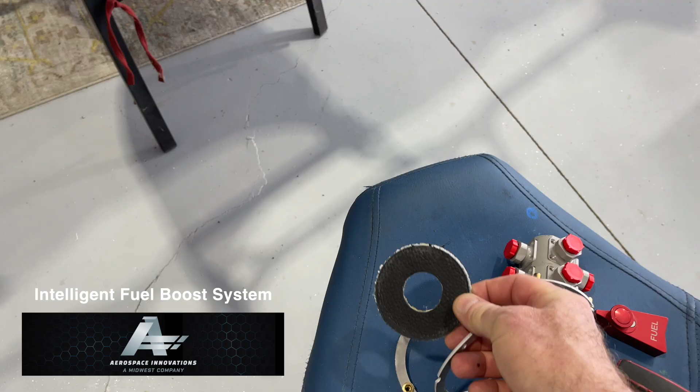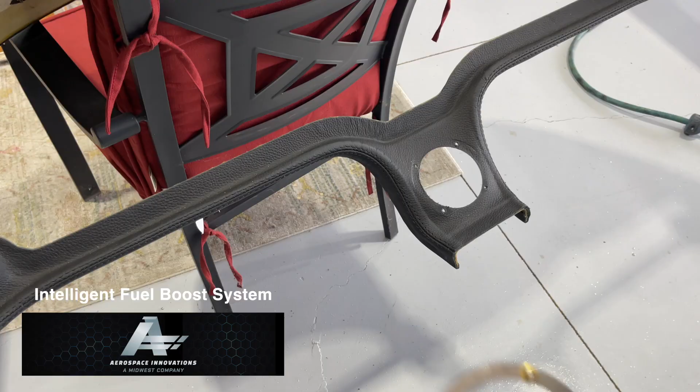This hole needs to be enlarged. So the hole looks like this initially. The kit provides this little template or ring that holds the piece while you drill the holes using this template ring, and then you keep those in there with Clecos. I used a hole saw to cut this piece out. Next, what goes in is this backer plate on the back here, and then we've got this detection board or sensor board that gets installed on top.

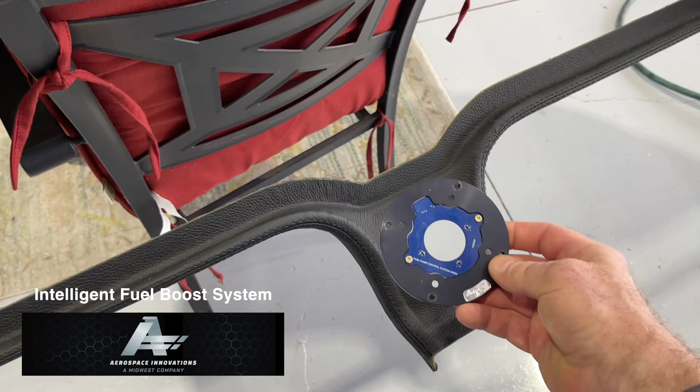So I'll do that next. This is the fuel selector as it will look when it's finished. Just mocking it up here so that we can see what it looks like.

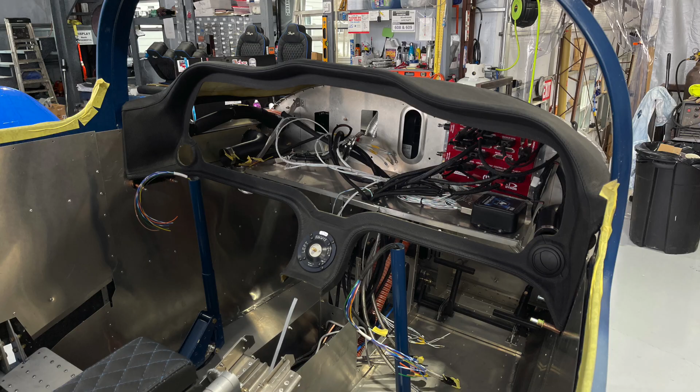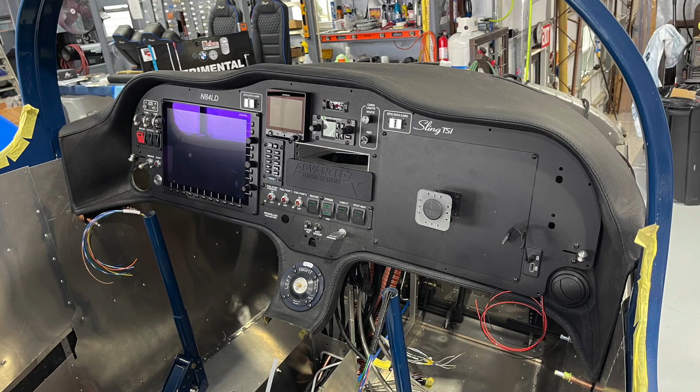And then, as you can see here, this is the leather dash panel inserted into place. The actual instrument panel on the top surface is not in place yet. You can see the fuel selector here, and now you can just see what it looks like. Again, just from many times of installing and uninstalling the panel, but I was anxious to see what it looked like in place. So that's just a temporary view of the instrument panel right there.

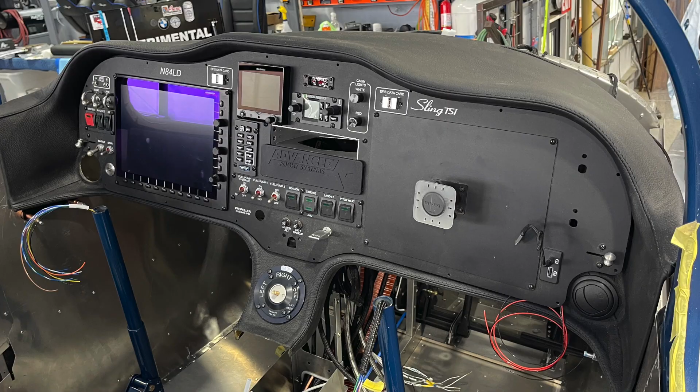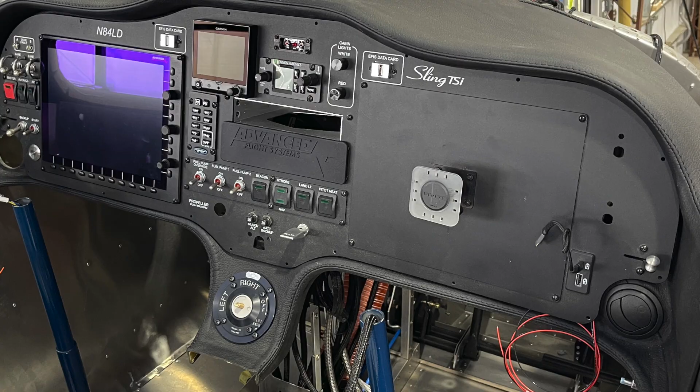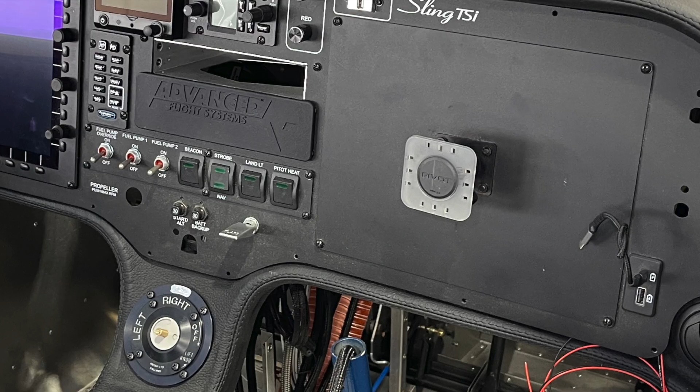On the right side there, you see that little bracket, the small square white bracket. That's where the iPad will go. Instead of going with two EFISes, I decided to go with just a single iPad in that location. I just like that, because otherwise you're just going to have an iPad somewhere anyway, so why have two EFISes and then an iPad too? I felt like one EFIS is fine, and then I can put my iPad on the right-hand side and use that for flight planning and so forth.

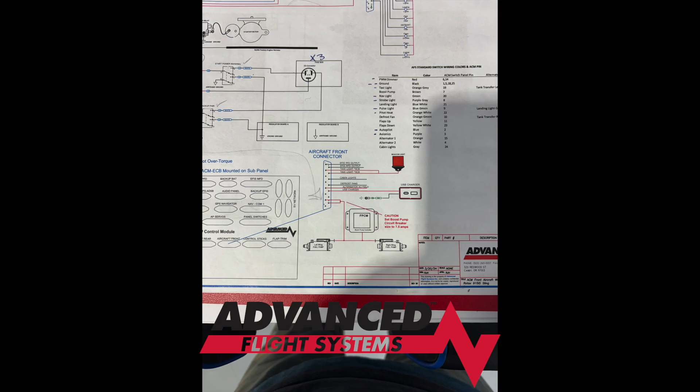So here we are, back into these wiring schematics and drawings that were provided by Advanced Flight Systems. They've done a great job detailing where everything goes. My communication with those guys has been fantastic. I work with Jonathan and Kyle both. I know Jonathan is probably totally wiped out from my emails and questions. I'll send him videos and questions I have on the wiring, and sometimes I'm overkill with it. I'm asking a lot of questions he's already answered, just reconfirming, so he probably gets a little frustrated that he's already answered the question.

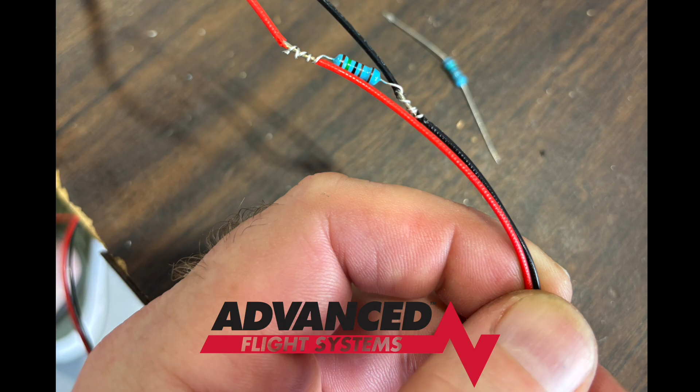Here is where the lane light indicators for the Rotax, lane A and lane B, go - you've got those lights above each of the lanes, and then there has to be a resistor installed. So I worked with Jonathan on how to do that, and those are in place now.

These are the fuel pump switches, from Aerospace Innovations, the guys up at Midwest. These fuel pump switches integrate with the existing Rotax fuel pump systems - not boost, just a pump system with Rotax. So we're combining these switches with the original system. Just showing you how the wires are laid out, and there's quite a bit of wires there. Here we go with the HIC A and HIC B.

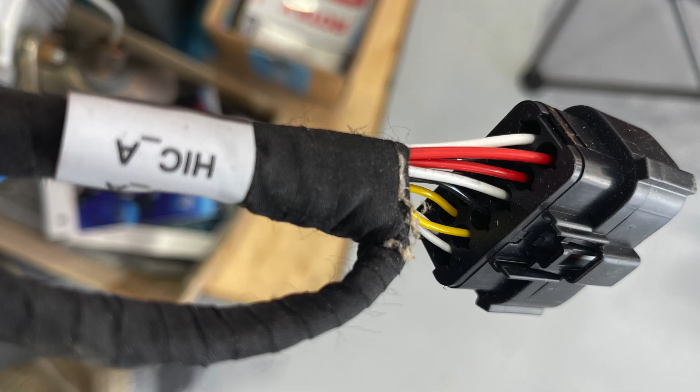So this was a new thing for me. When I built the Bearhawk, I was using a Lycoming IO-540, and the amount of electronics and technology on the Lycoming is not as significant as it is with the Rotax. So I've learned about what the HIC A and HIC B are, which was pretty much a new world for me. It took me a while to grasp this. I studied the Rotax manual, and I studied other builder videos.

And so these were things that I had to understand. This plug actually gets installed through the firewall, and here is an example up there at the top. That's the opening for where those plugs will go in, and then the HIC A and HIC B connectors go underneath the instrument panel, and then there are more wires that come in from the panel into the HIC A and HIC B. So again, it's just a completely different way of thinking about wiring compared to what I was used to in the past.

Here are the two inside, these two plugs you see, are round plugs, sometimes called cannon plugs. They did not come with the kit, although there are two holes in the firewall specifically for these. So I struggled with that, and finally found a builder who could get me the part numbers from Mouser Electronics, where I ordered these from, and I got those installed.

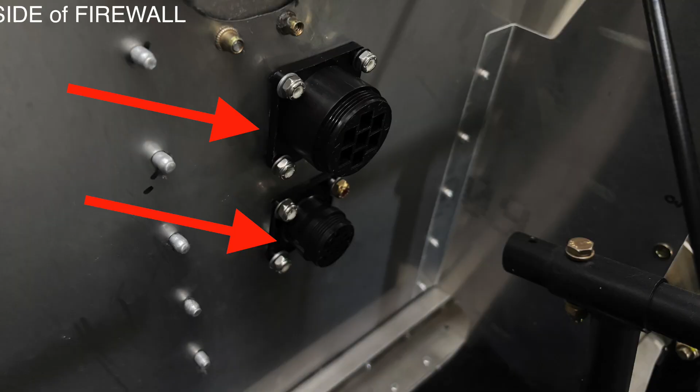So here we go. As I've been building my airplane, Rotax comes out with 3 service bulletins. One of them, the first one, was for the oil spray nozzle.

I was fortunate enough to connect with Sean Tucker in Rock Hill, who came up one day. He'd actually come up earlier in his airplane to visit his Sling TSi. I'm going to put a separate video out about the ride I took with him later on in Rock Hill, in his Sling TSi, which was actually my first ride. That was exciting, and it really confirmed that I'm building the right airplane.

But anyway, Sean Tucker's here with me. He went down to Lockwood in Florida, where there's a Rotax training center, and got his

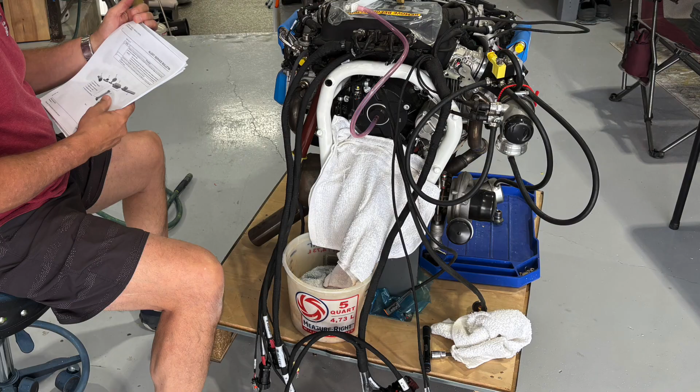I believe it's called IRMT, the Independent Rotax Maintenance Technician Certification. So with these service bulletins that came out, there's 3 of them. We'll talk about all 3 here, but like I said, the first one's the oil spray nozzle. We have to have an IRMT perform this inspection. It's just not something I can do myself and document in my logbook.

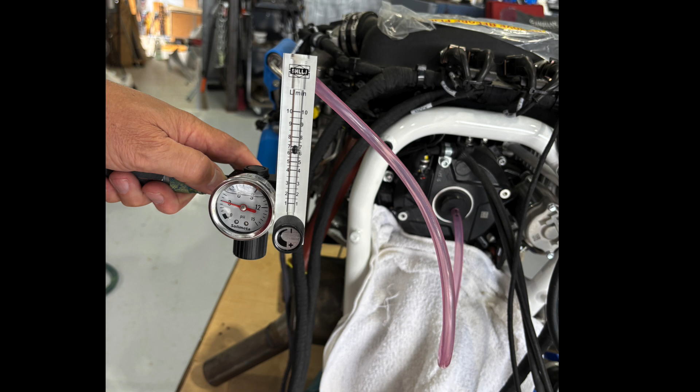So Sean is here with me. We're going through that, and he brought the tools to perform this inspection. We did it 3 times, I believe, and documented it here with this picture to verify that we are within the parameters on this oil spray nozzle.

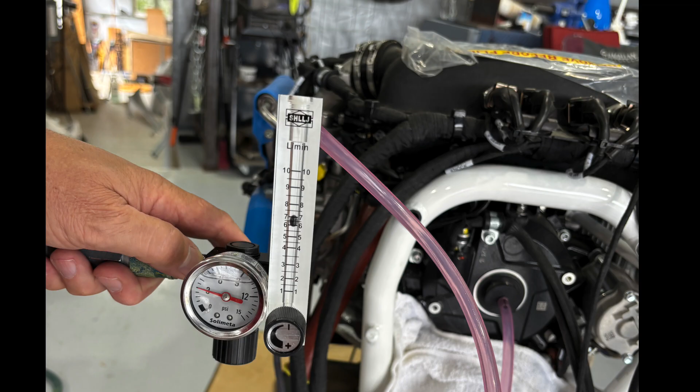So apparently what happened is at the factory, when these engines were built on the assembly line, too much thread lock was used on the oil spray nozzle. I don't know exactly the components inside, but there's an internal oil sprayer that, as I understand it, helps lubricate and cool the generator. If that orifice is blocked, that's not good, and the generator could fail.

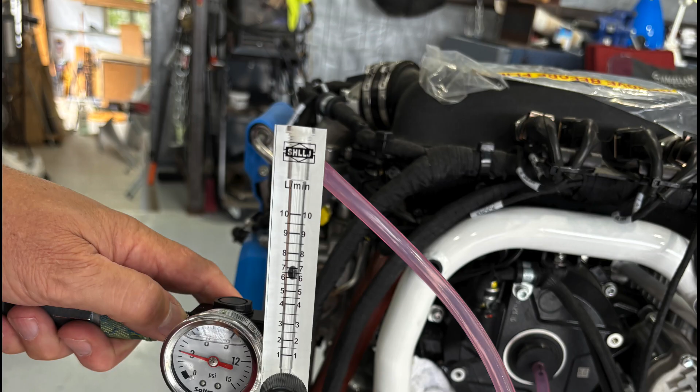Some people failed the inspection. Fortunately, in this case, we passed. That was a big sigh of relief when that was finalized.

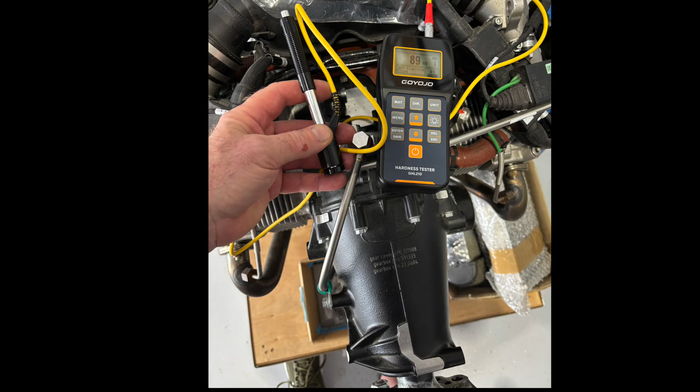The next one is the case hardness test, which is kind of surprising actually. You'd think that wouldn't be a concern, but apparently there's been some casting issues on these engines, so we have to test the case as well as the gearbox assembly. We test that with this tool you see in the picture, which determines the hardness of the material. I won't go into a big detailed explanation, but this test was also passed.

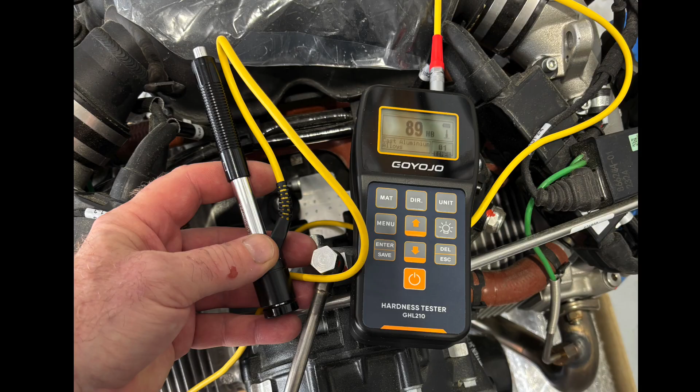So I don't have to send the engine off for any sort of repairs. That's good news.

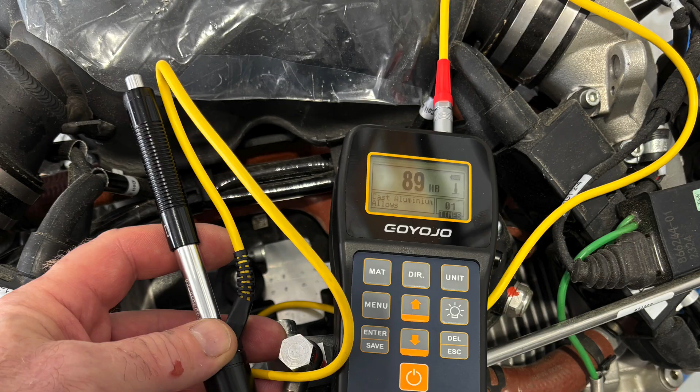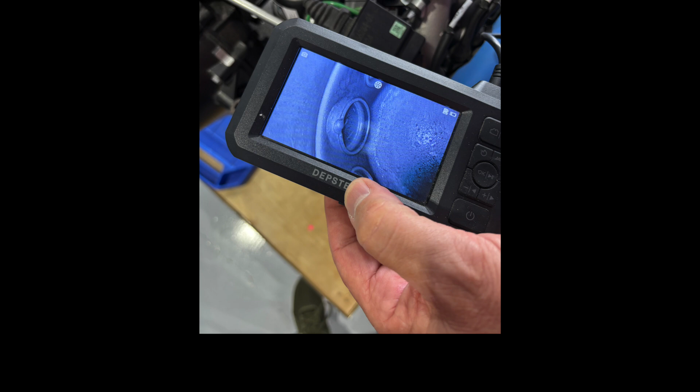Here we've got the expansion tank assembly inspection - again, another service bulletin. Fortunately, I've got this bore scope, and Sean again was with me. We use this to look inside. It's part of the coolant system.

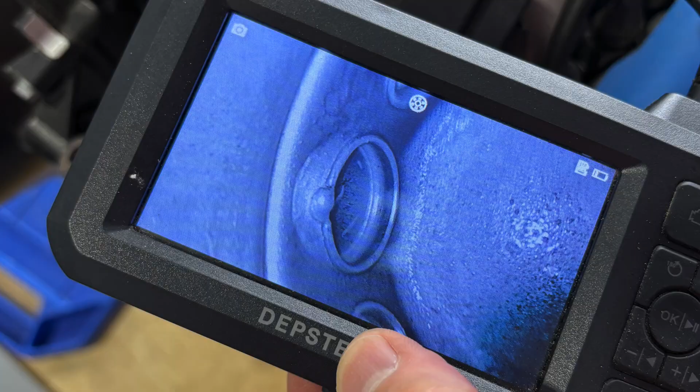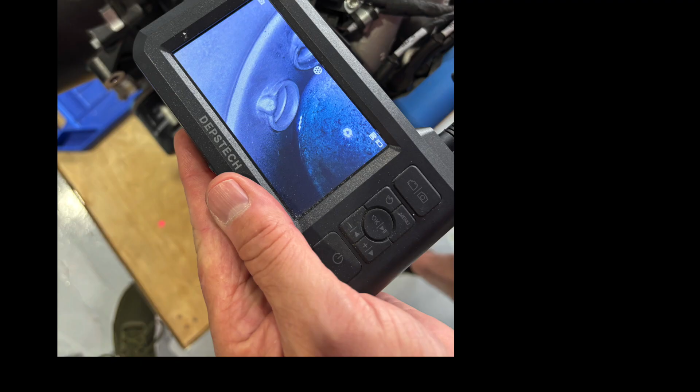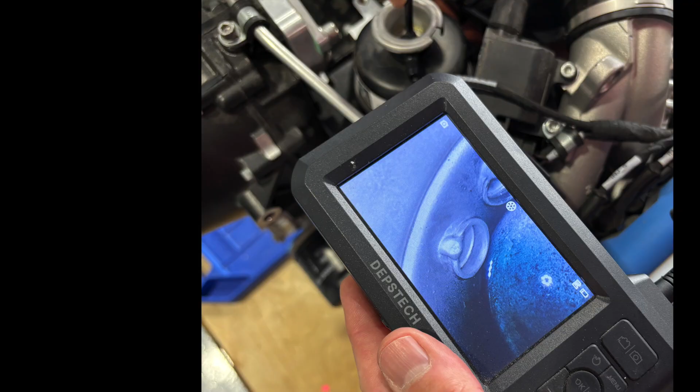As you may have heard, these Rotaxes are water cooled. So this is used for that, and we were able to determine that the welds inside the expansion tank were adequate. In the service bulletin, there were issues where these were spot welded and would leak, not actually providing cooling - the fluid would leak out so you're not cooling the systems. The system just doesn't work when there's fluid leaking.

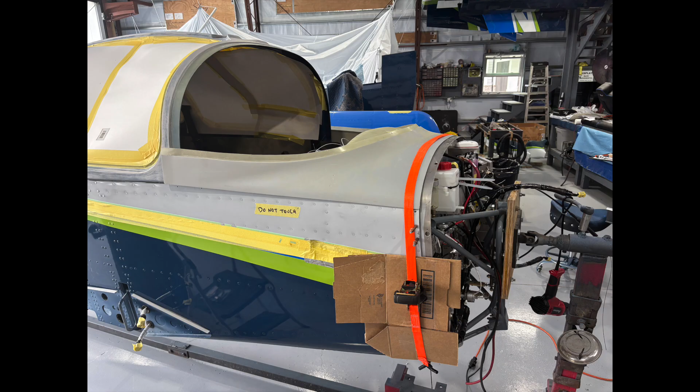Okay, now I'm getting to the point where I'm going to install the boot cowl over the front of the nose of the airplane. There's ratchet straps that hold that in place on both sides, and there's rivets that go all throughout those areas on the side panels of the airplane, the front cowling, as well as on the inside.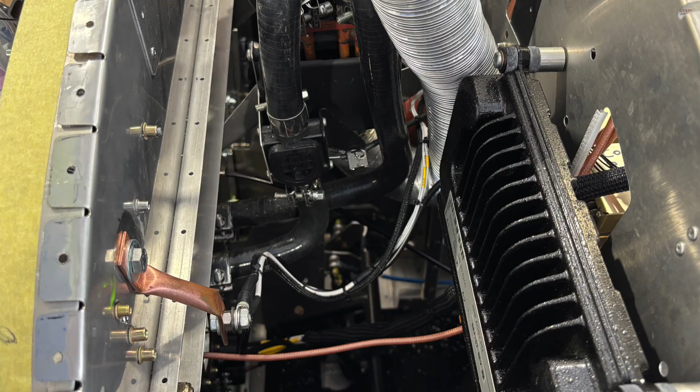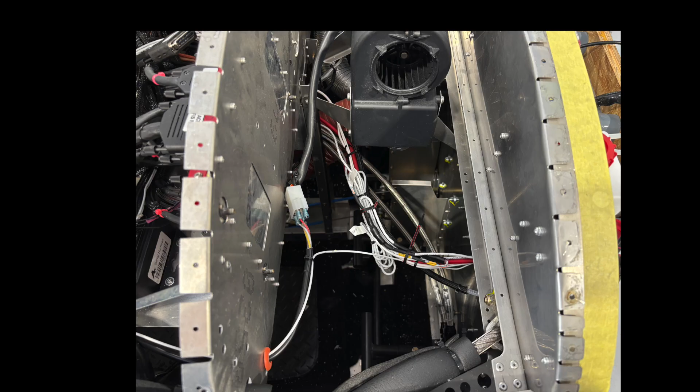So there's just a lot of rivets there, and this is one of those steps where you just kind of hold your breath and hope you didn't miss anything on the inside, because once this thing's on, you're not going to get back inside. So I took these pictures, so in the future if I have to think about something going on there, I've got these pictures to help me see what I'm looking at. Hopefully that's just it - once it's done I'll have to crawl in on my back to do any kind of work.

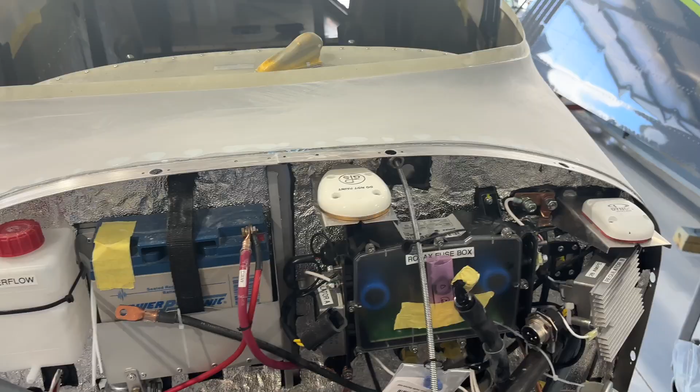So this is just a video of the super fill I used to flush out those rivets on the boot cowl, along with that seam through there. I like the way that's going to look once it's painted, and the finish aspect that goes along with that. So here we go.

Now I'm starting my painting again, back into the paint booth. As you've probably heard me say in other videos, this is why it's taken me so long to build this airplane, because there's just so much involved with painting. I think I've got about 5 months of work on just painting this airplane.

What you're looking at in this close-up is an issue I ran into with the clear coat I'm using. A bit of what they call solvent pop, giving me what some people call orange peel, but it's more than orange peel. I've worked on that a little, but this is not going to be a show plane, I'm not going to win any awards. I'm pretty happy with the paint job overall, but up close you're going to see stuff like this.

Now that I've got the canopy painted and the boot cowl painted, and I've got the logos in place, the N number, the Sling emblem on the side, as well as the experimental placard at the opening of the doors. And of course I'm still on the rotisserie, but everything looks good. I'm liking the way this came out.

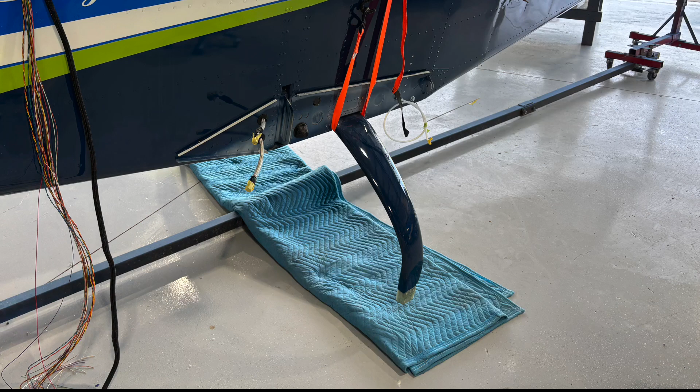So here we are now installing the undercarriage. My method for doing this is to put a large piece of wood through the canopy door openings on each side, then use straps on both sides to ratchet those into place. That was fairly simple.

I will say the instructions say to put the top bolt in first and then the bottom bolt, or whatever it says - do the opposite. You want to ratchet the thing up, put those bolts in, and do the opposite of what it's telling you to do in the instructions. Another builder, Jacob, told me about that, and he said once you do it the opposite of what the manual says, it goes right into place, and he was right.

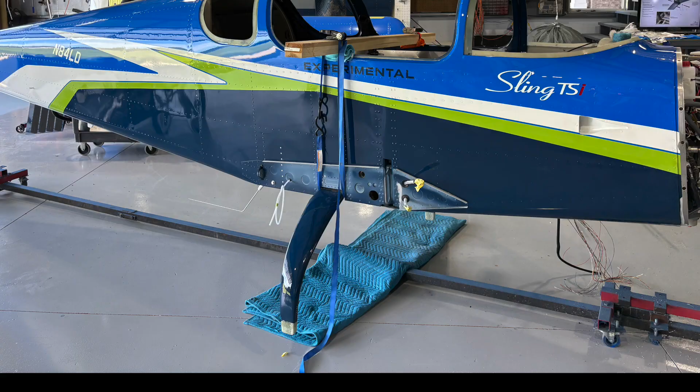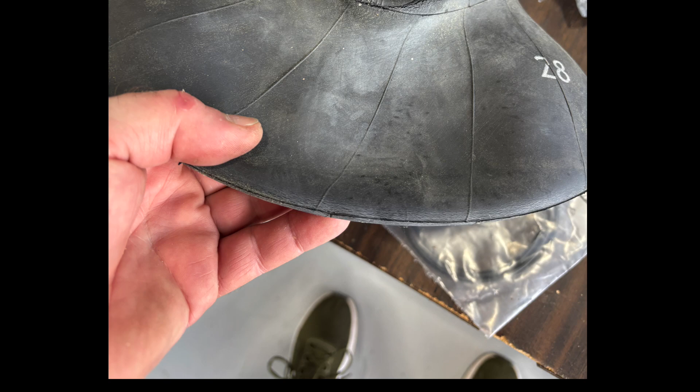I was ready to install - of course, now that I've got the undercarriage in place, I'm ready to install the wheels, tires, and inner tubes. But unfortunately all my inner tubes are dry rotted, so I reached out to the factory. Again they've been very accommodating, and they've gone ahead and sent me replacement inner tubes for all 3 tires. Don't know why that happened - not just one, but all 3 of them.

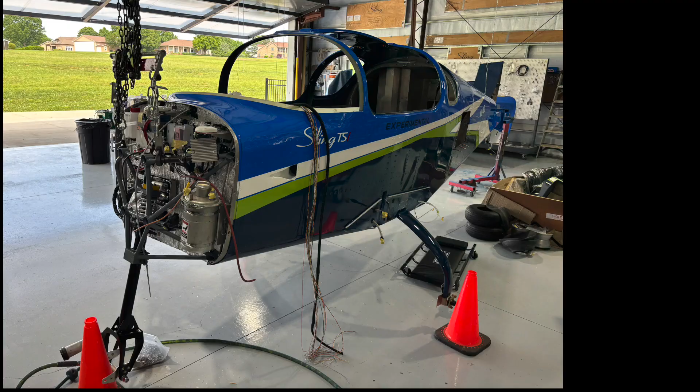But while I'm waiting for that, I went ahead and installed the nose gear, which takes a little bit of time but isn't hard. It's a nice system - I like that it's a coil over spring versus a gas filled shock or something like that. Pretty conventional but it works well. And then you've got the steering push rods that go into there, all that connects at the same time.

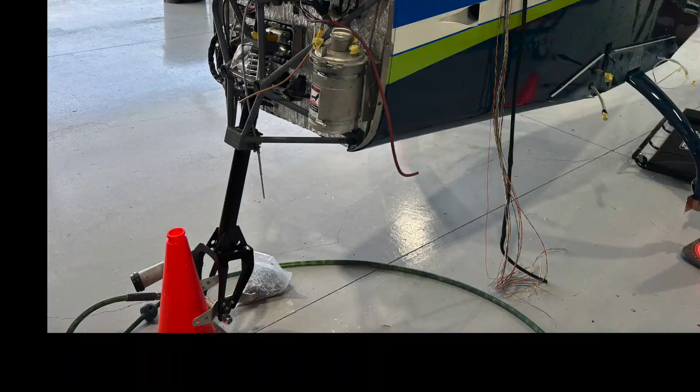And then back to more wiring - got a lot of little wiring things to work on. Always doing wiring. Even though you get these panels built for you, it's still really time consuming making all the connections and confirming and verifying everything. There's always something that has to be tinkered with as far as the wiring goes.

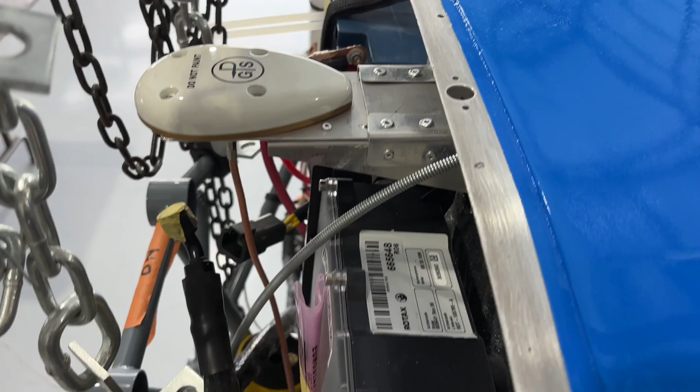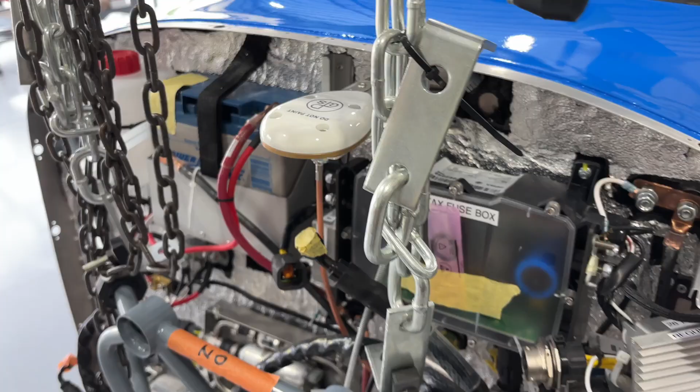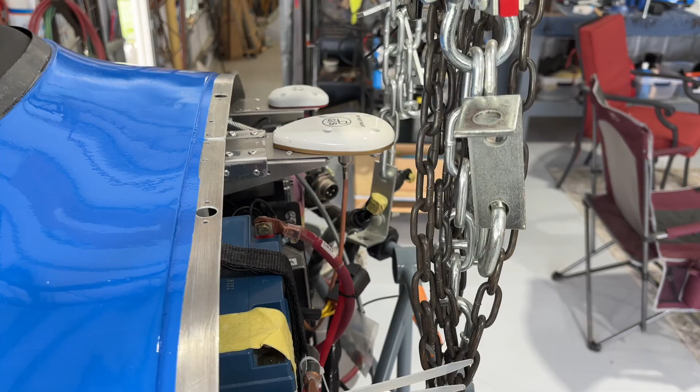This is a picture of where I'm putting my GPS antennas, and there's been some controversy. The kit provides brackets intended to be mounted on the firewall, as you see here. The difference with mine is I've modified them so they extend out further and get a bit more distance from the metal on the firewall. I know some people have said don't do this, use them as intended, but I'm doing it differently and modifying those - we'll see how that works.

Upholstery - I've done some of the panels, and I've got all the riv nuts installed to hold that panel in place onto the leather dash. I've started installing carpet in the bottom, as well as some side pieces with the upholstery. That's all from Parana, and I'm thrilled with the way those guys have helped me with that upholstery kit - it's going together pretty well. Still have more upholstery to go, but liking the way it looks so far.

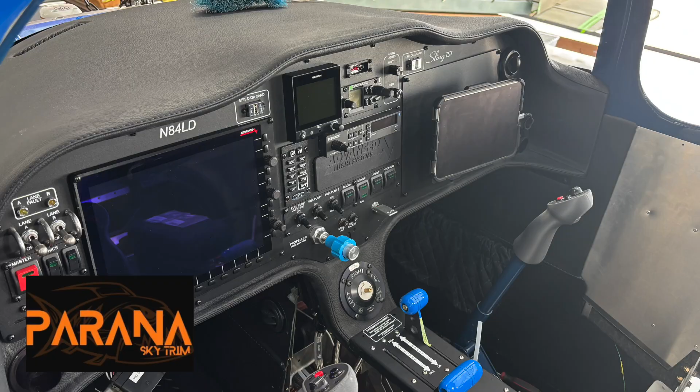Now that I have the inner tubes, that situation's been resolved, so I'm able to install the tires and wheels and all of that. Pushing it out of the hangar just to get some shots of what it looks like now that it's off the rotisserie and on its own legs. That's kind of a big milestone day.

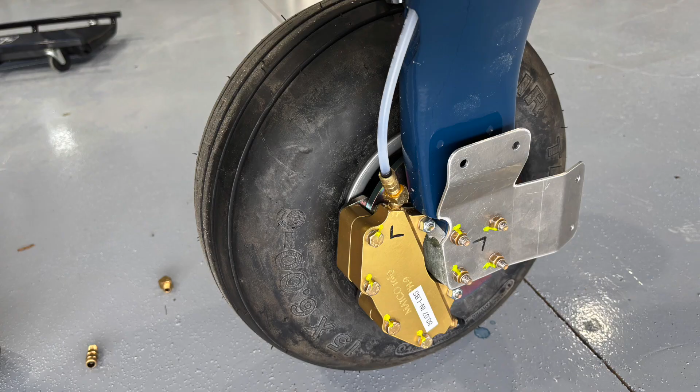Next, beginning to work on the brakes - these are the upgraded Matco double puck brakes. From what I understand, the factory has now gone from the single puck brakes that originally came with the kit to providing these double puck brakes as standard. That's good news, so you don't have to worry about buying the upgrade like I did.

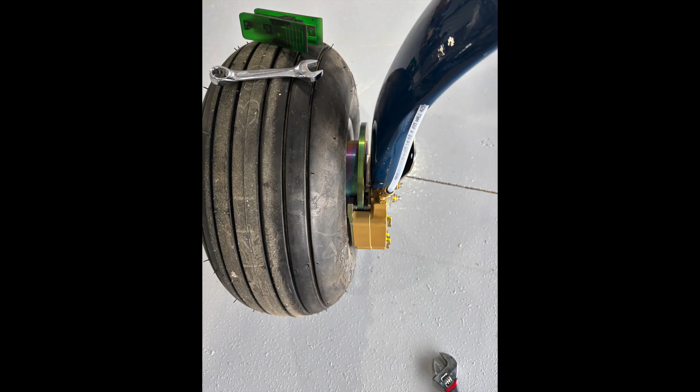Installing the wheels, there are some plates that go on the undercarriage here. You can see that aluminum L-shaped plate, and that's where the wheel pants are supposed to attach. I put this on, with 4 riv nuts on the top and side of that L bracket, so I think I'm ready to put my wheel pants on.

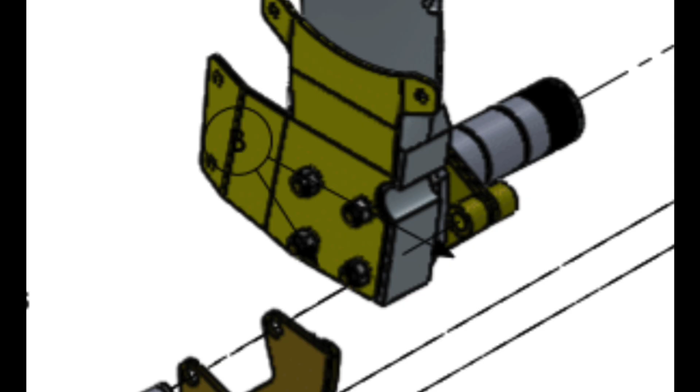Unfortunately, I go to put the wheel pants on and they don't fit, and I can't figure out what's going on. So I took a closer look at the drawing, and the drawing shows the bracket made differently, with 2 tabs at the top. Whatever bracket they sent me was not the correct bracket.

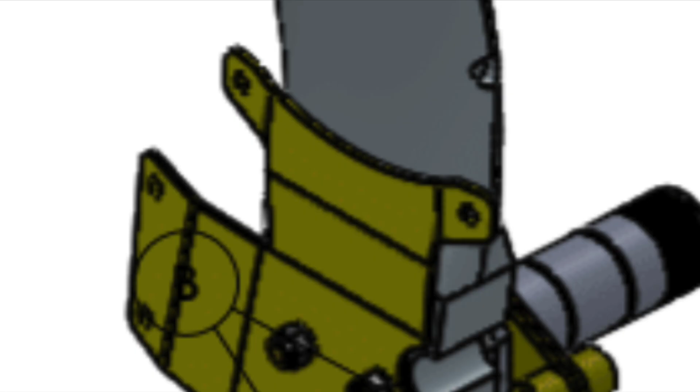So again, I reached out to Sling, and as of today, June 15th 2025, I've been told those replacement brackets have shipped and are in transit to me right now. Once I get those, we'll swap them out.

That's what the wheel pants look like - I just kind of mocked them up. I don't have the 2 brackets I need yet, but I was anxious to see what it looks like. That nose wheel pant is kind of a pain - I didn't realize how difficult it would be, but it's on. I like the way these look, so we'll get them permanently installed once I get the brackets.

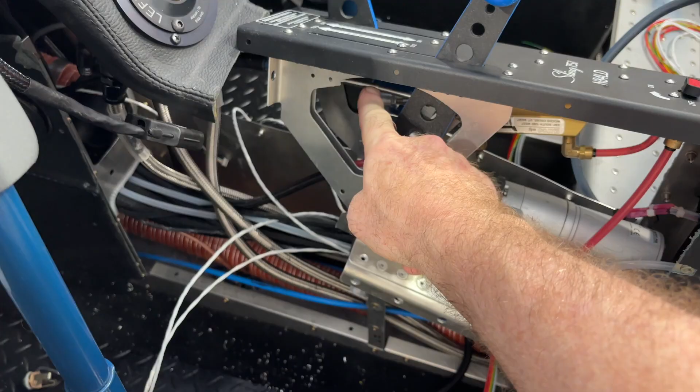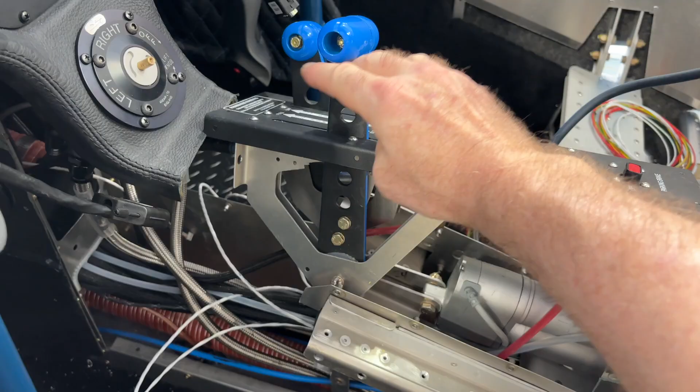All right, next challenge is the throttle assembly and cable extension bracket. I initially installed the throttle cable as I thought it was supposed to be installed. As I finished the connection, I saw that my lever only moves about 2/3 of the way, and I'm like, what is going on here? That cannot be correct. Turns out there's been a revision made to these brackets.

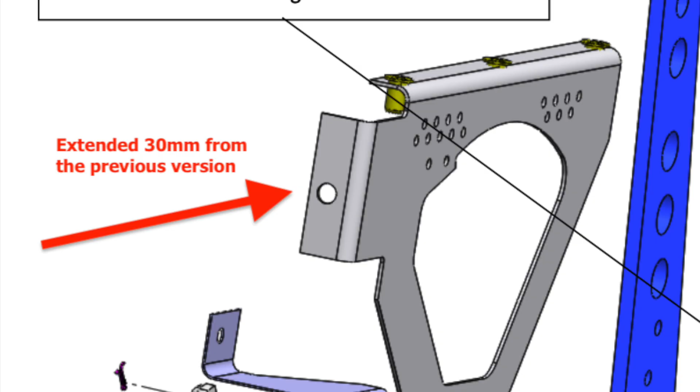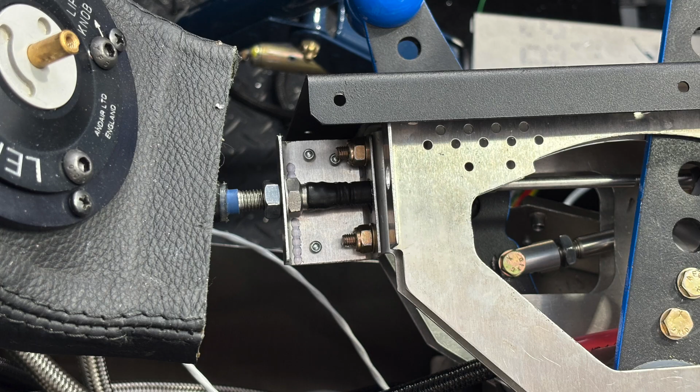Turns out there's a new throttle cable being used versus an older one, which requires a new bracket - you can see where that arrow is pointing. It extends about 30 millimeters away from where the original bracket was. You probably don't know what this means unless you're seeing it, but what I did was add a 30 millimeter extension to my brackets, reinstalled the throttle cable, and now I have the full movement I need on the throttle. That dilemma is resolved.

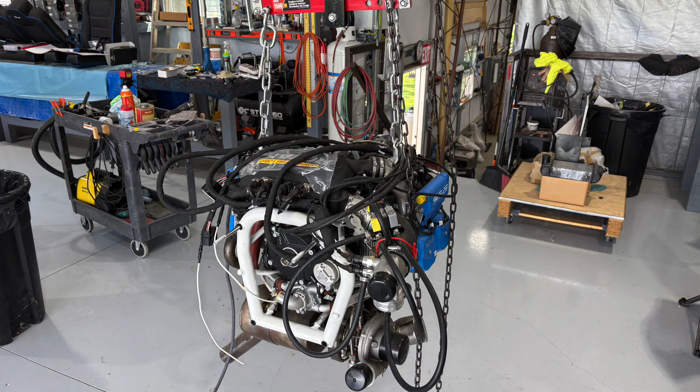Next is the engine installation, which I just did yesterday actually. I've got my chain hoist rigged up, my spreader bar, and I've detached the engine from the shipping crate, ready to put everything on board.

The only thing I had to deal with was a rivet in the bottom right corner of the engine mount that had to be removed - there's a captive nut there you have to take out. It's a bit of a challenge, but I managed to get it loose. Just dig around in some of the other builder manuals and logs, and you'll see people talk about this and how to handle that problem. Once that's taken care of, it only took me a few hours.

Then I was able to connect the engine to the bracket on the front - it's only 4 bolts. Now that it's on, you can see how this looks. The wheel pants are just on there temporarily, but I have an engine installed, so now it's just a matter of making all the connections and routing everything through the firewall into the engine compartment and cockpit. For the most part, we're making progress.

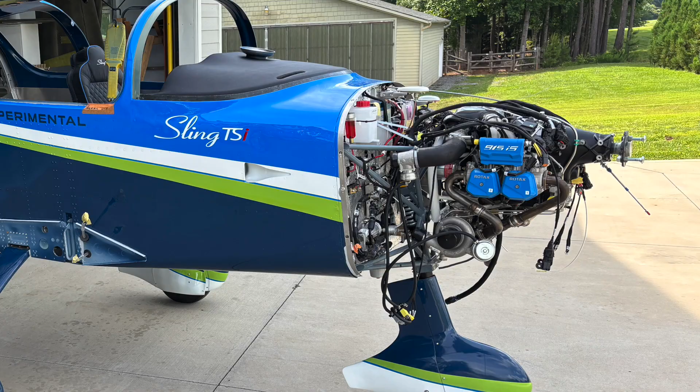Not going to make Oshkosh like I thought I would, but hopefully by the end of this summer. Everybody asks, when's it going to be done? I don't know - when you run into situations where your inner tubes have dry rot, your wheel pants have the wrong brackets, your throttle assembly needs to be modified, you can't ever put a time on this stuff. Hopefully we'll be wrapping this up soon and have this bird flying before the end of the summer.